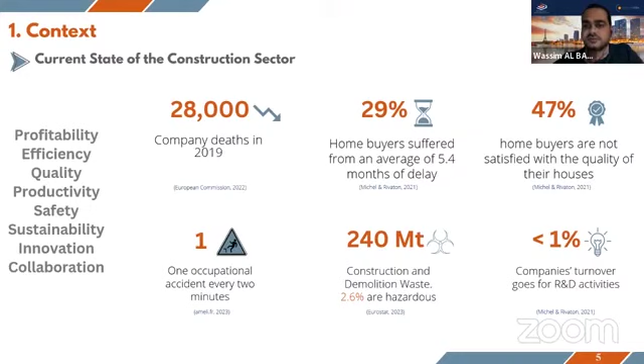Therefore, there is a need to create a change in the industry, in the practices, in technology, and in the way of thinking. One interesting report presented by McKinsey & Company showed different opportunities to create this change in the industry, in terms of reshaping the regulation, reviewing the way of contracting, rethinking the design, and improving the whole supply chain and procurement practices.

And the same report pointed out the importance of the industrialization of this industry, of the construction industry, by presenting some technology-based solutions. The construction industry is known as a low-tech industry that does not value much the importance of technology, in addition to creating different practices depending more on modularity, prefabrication, and standardization, and the adoption of lean construction.

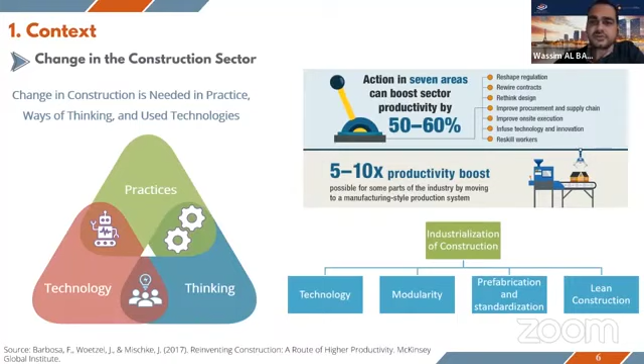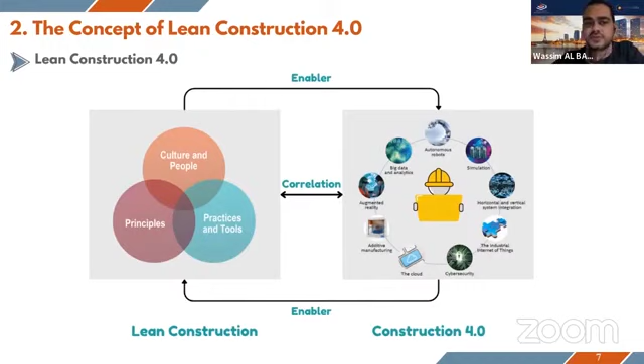So the adoption of lean construction with Construction 4.0 can be covered when working on the title of Lean Construction 4.0, which is the integration of two important concepts: lean construction and Construction 4.0. Starting with the first concept, the origin of lean construction comes from the Toyota production system, which was developed to efficiently and quickly deliver high quality vehicles to satisfy client needs.

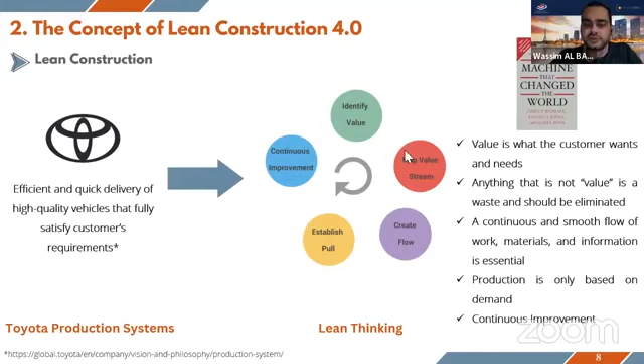Based on lean thinking, everything that does not add value for the client is a waste and should be eliminated. And there is a need always to create a continuous and smooth flow of work, materials, and information in order to make a continuous improvement in the production process.

Apart from the different definitions of lean construction, there's one interesting definition that we can adopt. In project management thinking, there is this iron triangle, or the project management triangle, which supposes that for each product, project, or service, there are three main constraints: time, quality, and cost. And whenever we want to improve one of them, we are obliged to sacrifice at least one of the others.

So if you want to deliver the project earlier, we may sacrifice the quality and cost. But lean thinking is about working in order to try to improve everything together: time, cost, quality, and even go beyond that to improve stakeholders' engagement, collaboration, safety and health, sustainability, and client satisfaction.

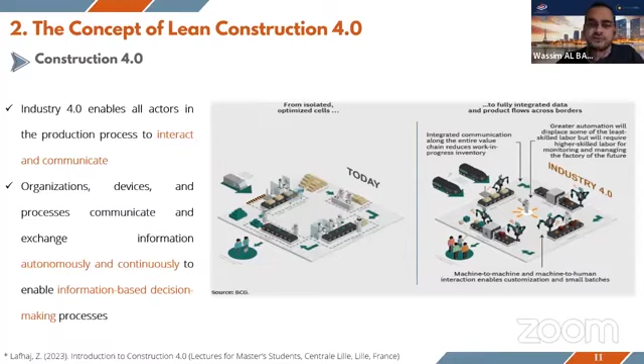The other concept is Construction 4.0, which is about the application of the fourth industrial revolution technologies and practices in the company, in the project, or in the production process. In these systems, Industry 4.0 enables all actors to interact and communicate with each other using innovative technologies and practices, and organizations, devices, and processes communicate and exchange information autonomously and continuously to enable an information-based decision-making process.

There are many Construction 4.0 or Industry 4.0 applications and technologies that can be applied to the construction industry, such as 3D printing, digital fabrication, building information modeling, digital twin, artificial intelligence, Internet of Things, and many others.

So the motivation to work on this topic comes from the shared objectives between the two concepts, lean construction and Construction 4.0, which are about improving innovation, sustainability, cost and time saving, safety conditions, quality, predictability, and many others.

In addition to the need to integrate these two concepts, one example is that lean construction is sometimes considered a low-tech concept, while Construction 4.0 is a very high-tech solution.

So when we talk about their integration, that means that we don't overemphasize technology and neglect people, and at the same time, we benefit from advanced technologies in order to improve information sharing, the reduction of complexity, the inclusion of the client, and the traceability of the client's needs and requirements.

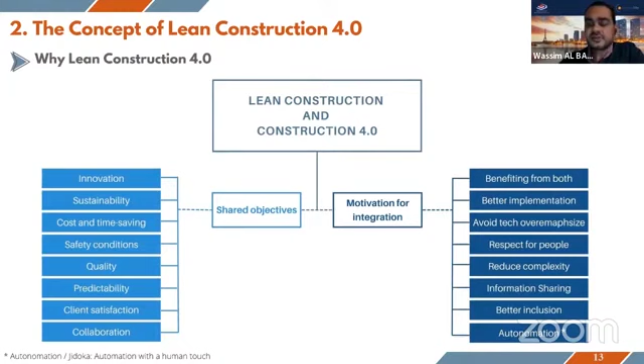So the first example in this presentation is about the integration of lean construction and 3D printing. In their integration, lean construction is very helpful to identify the value and work for a better value and improve the process continuously, while 3D printing is helpful to improve a safer, greener, and better construction environment. So both of them can work together.

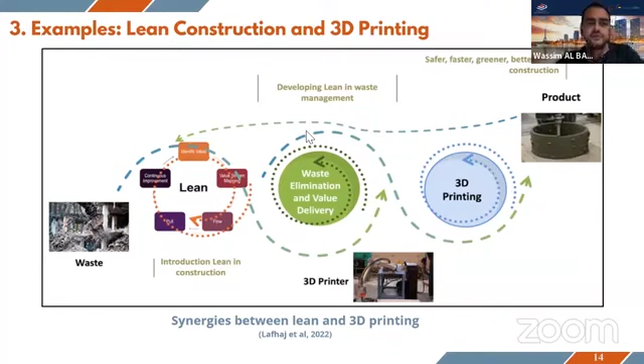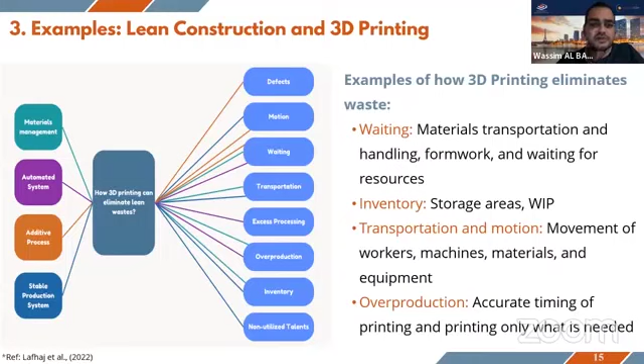So examples of how 3D printing can eliminate waste: in comparison to conventional construction methods, 3D printing can eliminate waiting for materials, for transportation, for formwork, or for resources. It can also reduce the large amount of waste in inventories, the transportation of workers, machines, and materials, in addition to the overproduction of material.

In turn, 3D printing itself may have some waste that should be eliminated, such as the defective layer, the design error, unprintable materials, waiting due to maintenance or quality measurements, transportation of spare parts, and overproduction also.

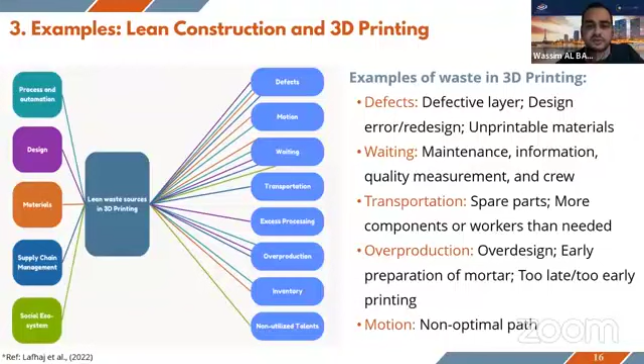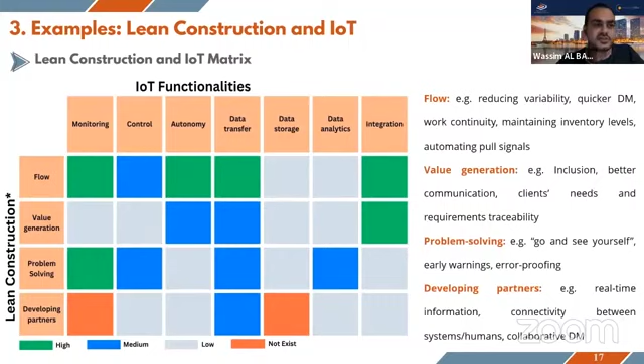Such integration is helpful to create a quicker decision-making process, to ensure work continuity on the construction site, to maintain inventory levels, to include and trace the requirements of the client, and to solve problems before they happen due to early warnings, and to benefit from real-time information to improve connectivity between different partners in the construction project.

The third example is about the integration of lean construction and digital twin. Digital twin is about creating a connection between the physical asset and its digital replica, then improving decision-making based on the quality of data collected from the physical asset and managed and analyzed in the digital replica.

This integration is helpful to improve planning and visualization—understanding the process and continuously visualizing it—and provides the opportunity for different partners to access these plans, achieving the principles of collaborative planning for lean construction.

It also helps improve the monitoring and control process using real-time data, identifying bottlenecks and eliminating waste in the process.

This integration is also helpful for risk mitigation by doing simulations in the digital twin and applying the error-proofing principles of lean construction. Finally, it improves supply chain management by modeling the entire supply chain to optimize production and delivery, achieving zero inventory and avoiding waste.

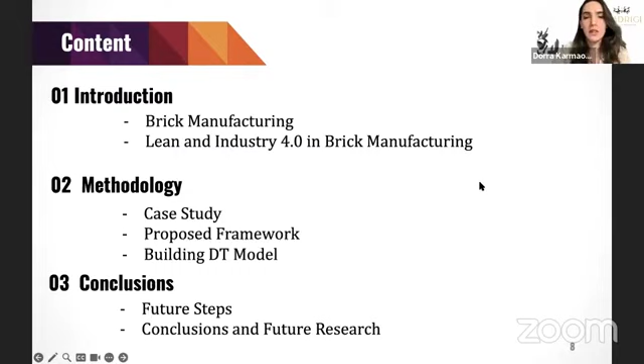Today I will present a part of my PhD work on lean and digital twin in brick manufacturing. I will start with an introduction to brick manufacturing, introduce lean and Industry 4.0, the methodology, and then the conclusion and future steps.

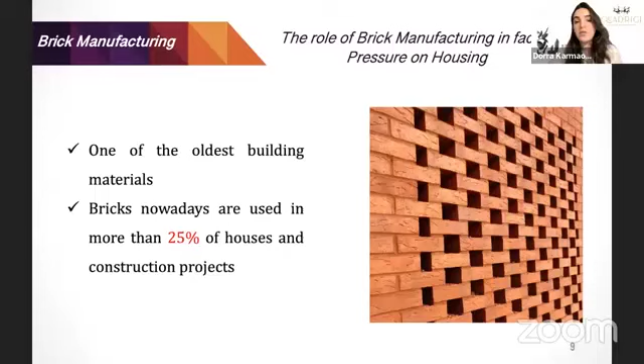As you know, bricks are one of the oldest building materials and are present nowadays, used in more than 25% of houses and construction projects. Some of the challenges that brick manufacturing is facing include increased population growth and migration to urban areas.

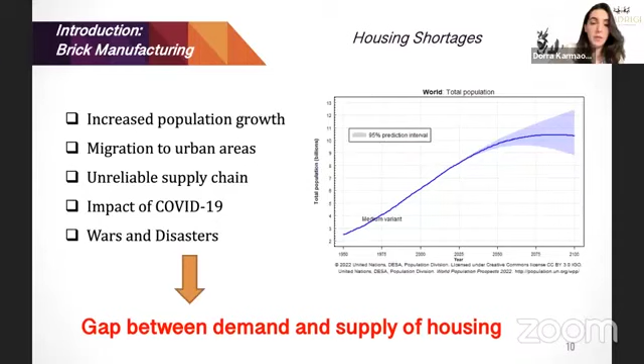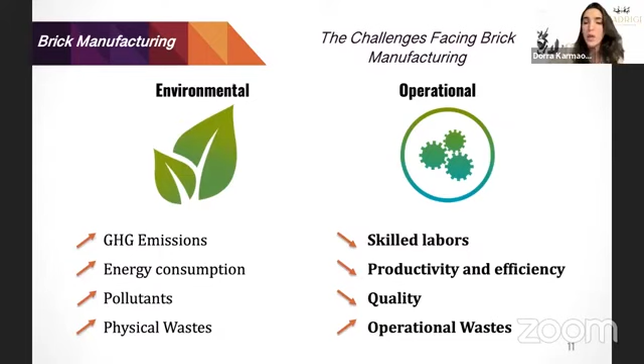Other challenges include an unreliable supply chain due to the impact of COVID, and others like wars and disasters—especially the war in Ukraine—which create a gap between demand and supply of housing. Brick manufacturing also faces environmental impact due to high energy consumption from the kiln used for the curing part of the process, as well as skilled labor shortages, productivity and efficiency issues, and low quality and operational waste.

So to overcome these challenges, we used Industry 4.0 to reduce waste, to improve the operational excellence, and to improve the energy consumption. Some of the challenges that we faced during this project is the lack of knowledge and skills in SMEs, especially with Industry 4.0 and new technologies.

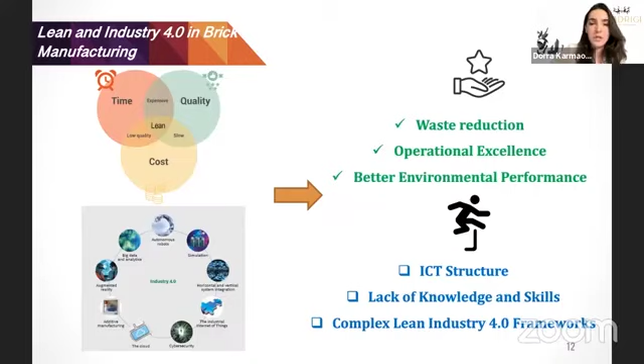So the case study is a company based in the north of France, which is a family-based company more than 100 years old, and produces different types of clay-based brick. It's a provider of brick for many projects in France, England, Ireland, and many other locations.

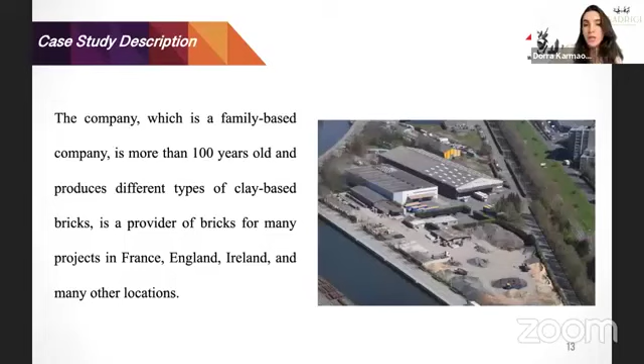The humidity is reduced to between 1 and 4%. And then we go to curing at a temperature which can attain 1,100 degrees Celsius. And then we go to quality control, palletization, and finally to storage.

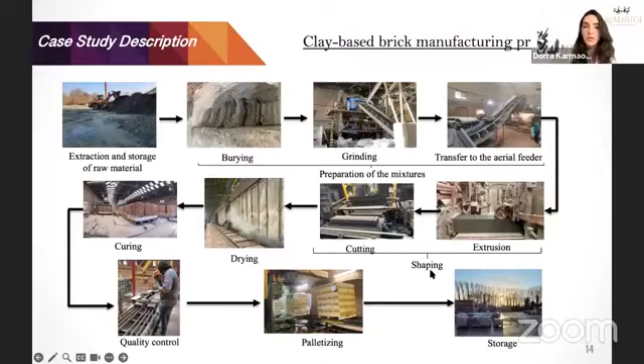So we started by studying the current production process to collect data and make some interviews with workers. There is also some data collected with sensors that already exist in the SME. Then we made some observations.

We stayed around 3 months or more to study the process and measure some data, so we could make our VSM, the value stream mapping, as a static model, and then we made our virtual model with digital twin.

We put all the data we collected for the VSM, then we can create the future production and create the bidirectional data flow between the physical and virtual model. The idea was to implement predictive maintenance to predict future failures in machines and avoid breakdowns that would cause productivity loss, because it's a problem that happens very often in the company.

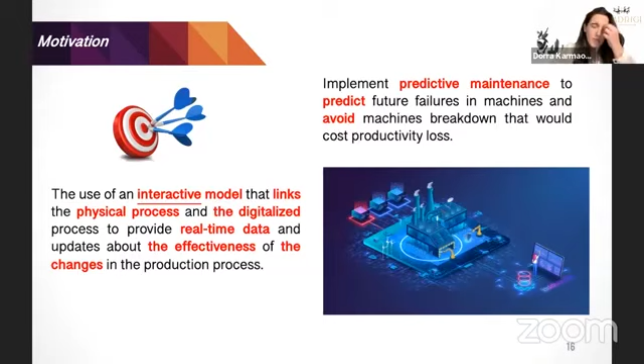So the use of an interactive model links the physical process and the digitalization process to provide real-time data and updates about the effectiveness of change in the production process, especially as the SME is trying to implement multiple principles of Industry 4.0.

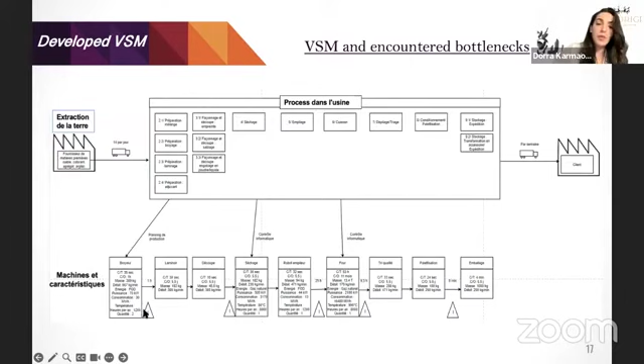So with making the VSM, we got as a result that there is a high level of defects in different places along the process, and stoppages in the production line due to some reasons such as fallen bricks in the wagon path, problems in the machine, and stoppages due to the cutting machine.

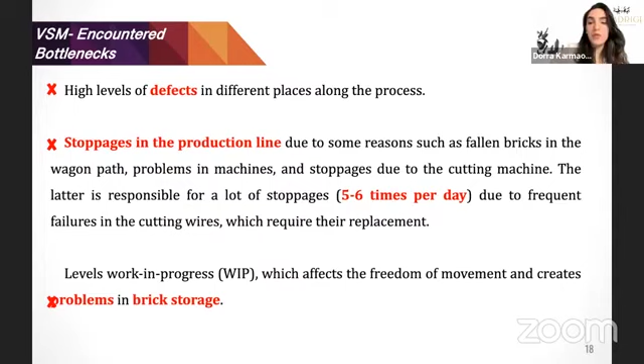The latter is responsible for a lot of stoppages, around 5 to 6 times per day, due to frequent failure in the cutting wires, which require their replacement each time. Each time the machine stops, it requires around 15 minutes to put in new wires. Also, there is a level of work in progress which affects freedom of movement and creates problems in brick storage.

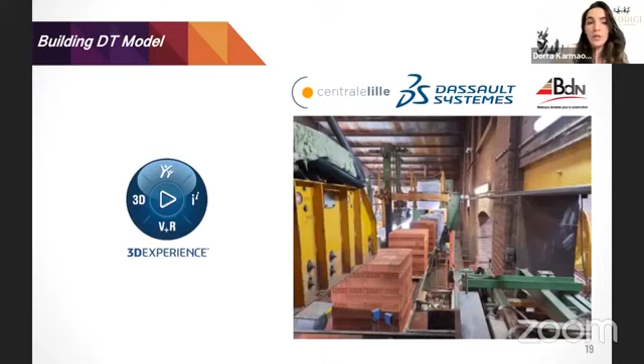So the idea was to make the digital twin of the production line, which was made in collaboration with Dassault Systèmes and Centrale Lille. We created the 3D modeling of different states of the brick, starting with raw material storage, mixing, grinding, the column to be cut, and then we have dried brick, fired brick, and package.

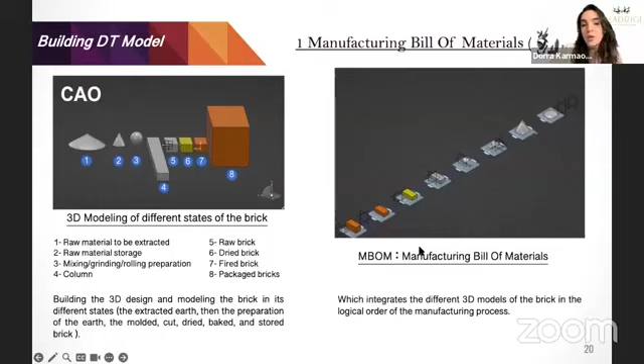And then we created the manufacturing bill of material, which integrates the different 3D models of the brick in the logical order of the manufacturing process.

Then we made the process planning and flow simulation, which covers creating workstations consistent with the flow in the original process and linking them according to the previous phase.

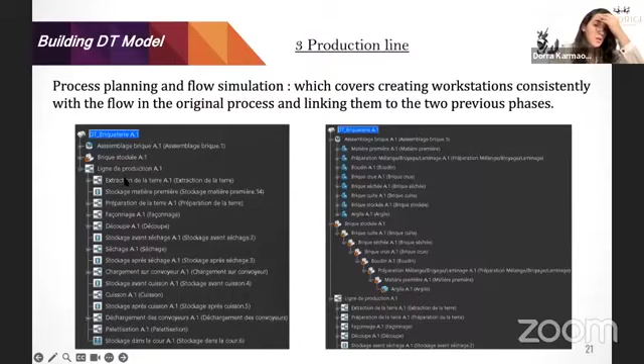So in each phase, we created the workstation, and we put in parameters for each station: the flow, the cycle time, the estimated operation time, interval between failures, repair time. This is the same data that we collected in the value stream mapping. And each workstation has to be connected to the workstation after it and the one before.

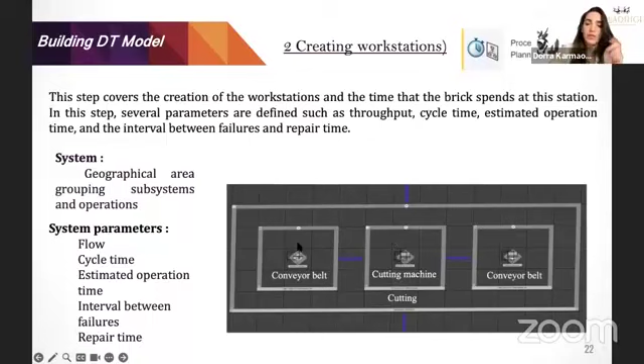At the end, we get this production line with different steps, and for each step we have the different workstations. For example, for the cutting machine here, we have the conveyor belt, the cutting machine, and another conveyor belt that sends the material to storage and then sends it to the dryer.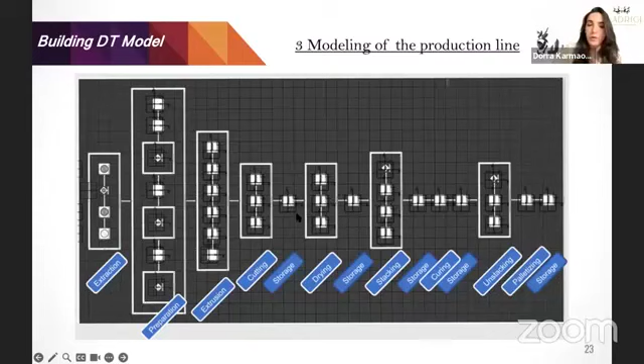As a result, the digital twin presents useful information in the shape of a Gantt chart about the system, the operations, duration of each part for each part of the production line, and the most important part is the rate utilization of the system machine.

So, for example, here, which is in green, it means that there is a low utilization rate of the machine. So it's something bad. I don't know why it's in green, but it's the software.

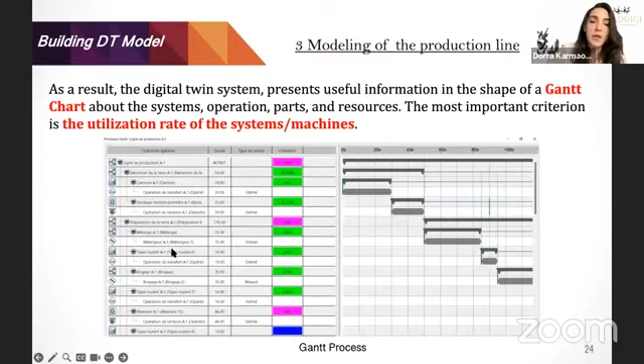So here, for example, if we want to make any change on the machine, we can test different scenarios and try to test how it will impact the whole process of the production line. This will enable us to determine, if we can stop the production line, whether we can change some parameters of the kiln, or we cannot do it.

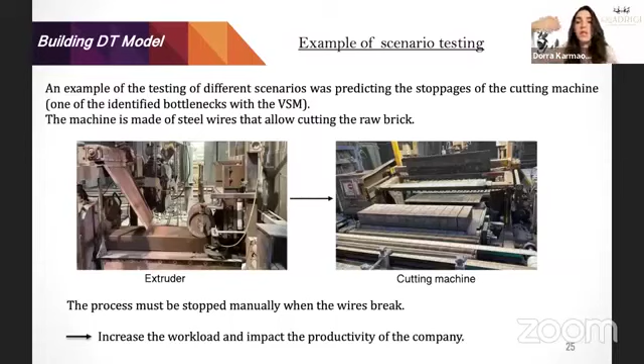So I will present a kind of scenario that we tested. As I mentioned before, there is the cutting machine where the wires frequently break. Each time the wire breaks, we have no sensors, so the workers will detect that there is a problem in the wire machine at the next station. So here the idea was to put a sensor to test if we can predict the breakage of the wire and automatically stop the process. Once the process is stopped, there will be a kind of sensor to inform workers that the line is stopped.

So here, the rate utilization of the machine - we suppose that there are 6 stoppages per day, and for each stoppage it takes 15 minutes to change the wires. So this problem will reduce the rate utilization of the machine by 7.5%.

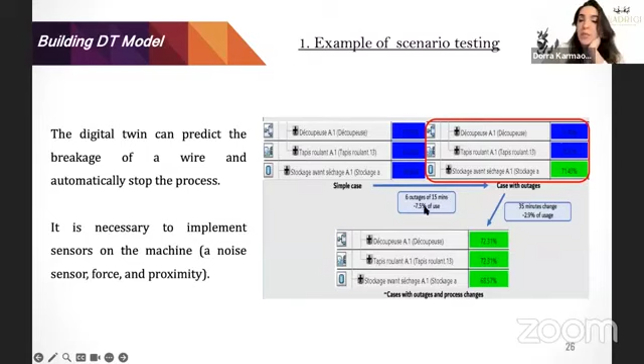And the second scenario that we tested: facing bricks are produced by sawing conventional bricks, which creates a lot of waste of material, energy, and even time for workers. Manufacturing them directly to the right dimension by modifying the production line would save over 6% of the energy used in the brickworks' annual production. So the idea was to test if we can make some changes in the production line to produce our facing bricks and then go back to producing conventional bricks.

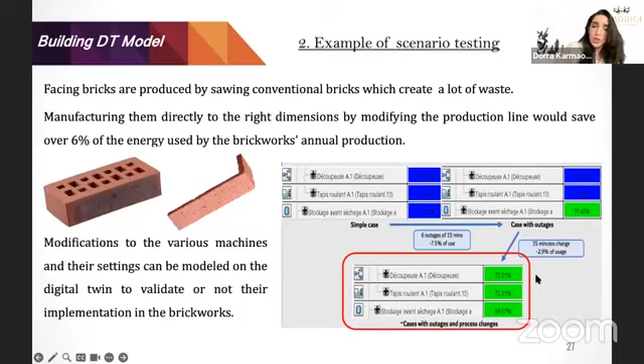To make these changes, we need 35 minutes. So it will reduce the utilization rate of machines by a further 2.9%. Combined with the stoppages from the broken wires, this will affect the utilization of the machines by 10%, which cannot be possible. So the idea is to make a second production line for facing bricks.

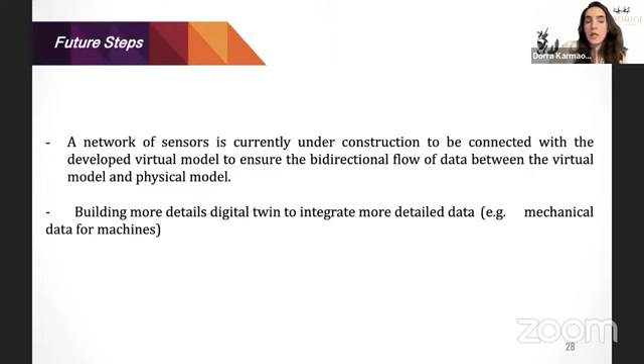As a future step, a network of sensors is currently under construction to be connected with the developed virtual model, to ensure the bidirectional flow of data between the virtual model and the physical model, because the sensors are very expensive. So we are trying to ask for funding from the government, because it helps SMEs develop and change their production line to Industry 4.0. Making a network of sensors will help us integrate more detail into our digital twin, so it can help us analyze the production line more.

As a result, the proposed framework allows for dynamic and continuous monitoring of the production line and testing different production scenarios, and integrating real-time data to improve predictability. The contribution of this work is that it shows an example of Lean and Industry 4.0 integration to digitalize SMEs and improve performance in brick manufacturing. As future research, we will try to modify and test the framework in other industries, so we can define the KPIs, and also investigate the impact of the model on performance and identify key performance indicators of the framework. Thank you so much.

Thank you so much, Dorra. Everybody's on time in this session. This is wonderful. Thank you. This was a great presentation. I tried to understand everything, but it was difficult because of the concept. But yeah, you explained everything very clearly. Thank you so much for being here. Okay, we have the last but not the least presenter here, Slim Rebai. Rebai, the floor is yours. We are excited to hear your presentation.

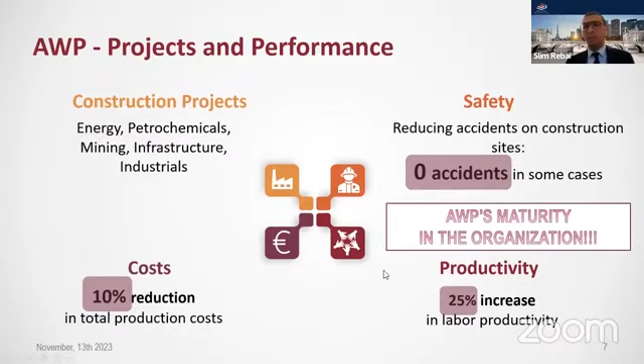Organizations that implemented AWP have recorded zero accidents in some cases, and it led to a total decrease of production costs by 10% and increased productivity by up to 25% in labor productivity. We can say these performances are reachable at a stage of maturity in implementing AWP in the organization. So how does AWP work?

The AWP principle is a construction-driven planning methodology, and its value is in improving delivery and execution efficiency. It is dedicated to complex construction projects, and its main principle is about full sequencing of all the work packages that are planned without constraints, with the mindset to do the work in the right way the first time.

The AWP stakeholders approach's main idea is to invite and involve all stakeholders from the beginning of the project, and they work together to develop interactive planning. As it is an execution-driven process to resolve individual constraints, this whole path is managed by the construction project team.

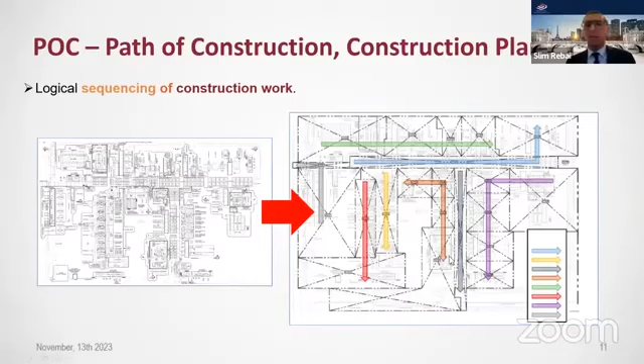The main deliverable of this methodology is the path of construction, concerning the logical sequencing of the construction work. We can see in the right image that the plot plan was divided into several areas, and here the arrows mark the construction path of the project.

The quality of the construction plan reflects the know-how and experience behind it—poor quality is an indicator for the likelihood of project failure, or rather, it is an indicator for the likelihood of a project's success.

The second main deliverable of AWP is the construction work areas. In our project, we decompose the plan into different parts of the site plan, represented as logical work areas. The construction work areas include all the disciplines, and in the image on the right we can see a selected construction work area.

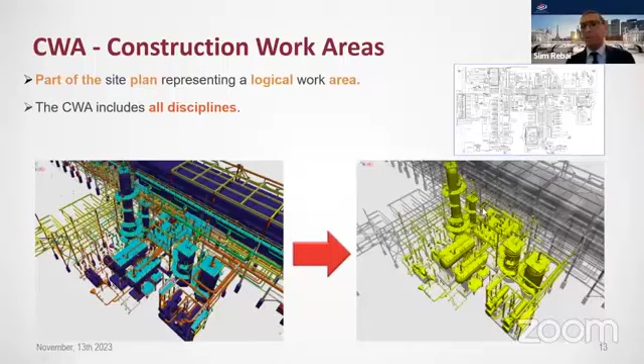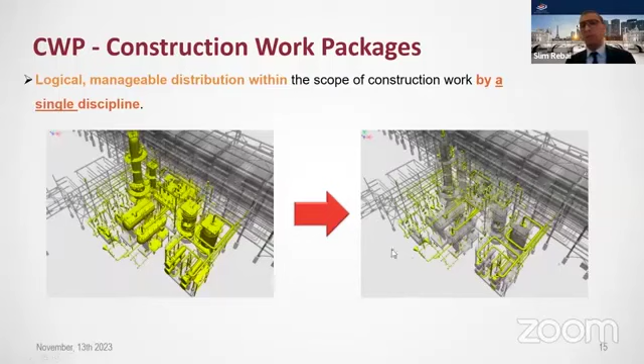This construction work area is itself divided into several construction work packages that are logical, manageable distributions within the scope of construction, divided by single discipline. Here we can see the example of dividing the pipe work in the construction project.

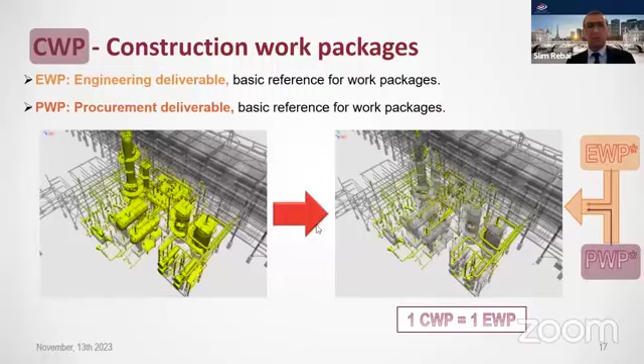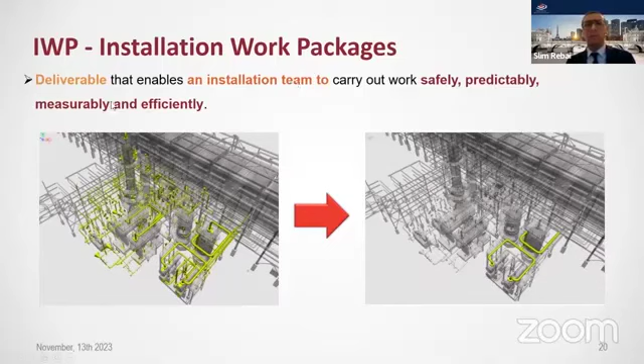After that, we need the input for the construction work packages—here we are talking about the engineering work packages and the procurement work packages, which are the deliverables for maintaining and doing the work of the construction work package. Since this methodology is construction-driven, every construction work package is divided into installation work packages, and these deliverables enable an installation team to carry out the work safely, predictably, measurably, and efficiently.

Here we can see the overall sequencing of the work package. We start by decomposing areas, and in each area we focus on disciplines, and in each discipline we need the engineering and procurement work packages, finishing with the installation work package.

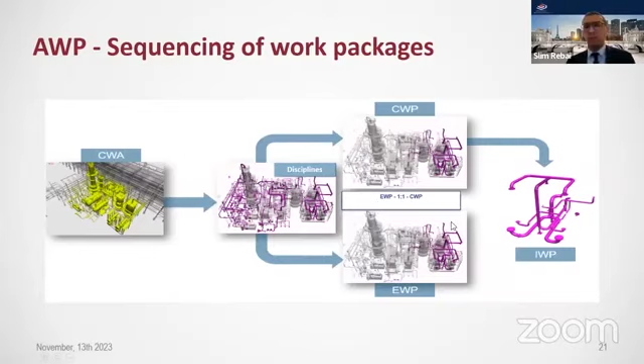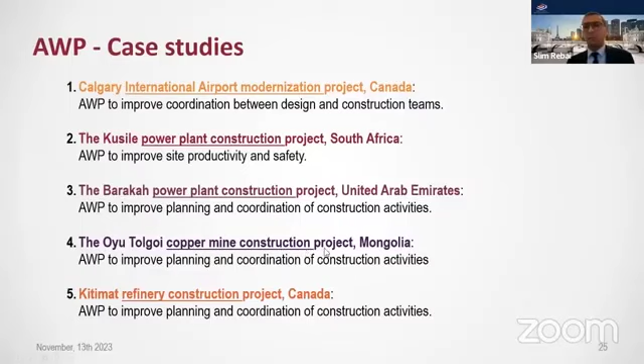Different cases I'm sharing with you include the international airport modernization in Canada, power plant construction projects in South Africa, the Barakah power plant construction project in the United Arab Emirates, the copper mine construction project in Mongolia, and the refinery construction project in Canada.

So AWP could be identified as a solution for all critical planning elements, as it is a detailed engineering approach that solves all the constraints. Finally, once on the construction phase on site, the methodology changes to become an agile approach. Here we maintain that there is no mobilization on the site until we solve all the constraints that still need to be solved.

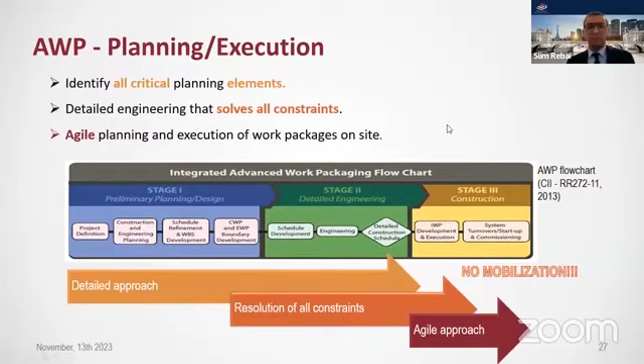So the traditional approach of construction projects is a linear construction methodology or project approach, and the AWP is based on collaboration between the project owner and the project manager in the first way, and after that, in the collaboration between all the team of the project members.

So the first question is how to integrate the AWP. The first need is to maintain good preparations that involve all the engineering to respect dedicated times. These preparations have to integrate a stronger sequencing of activities on the project, and this preparation has to be construction-oriented planning as a result.

The second need is the contracts themselves. The contracts that will be used on the project have to integrate the AWP expectations at the outset of the project, and here the stakeholders' coordination and involvement have to be right from the design phase.

Also, we have to integrate the training, the support, and the coaching of the AWP. And here I'm sharing different ideas and training courses and materials that could be integrated with the AWP.